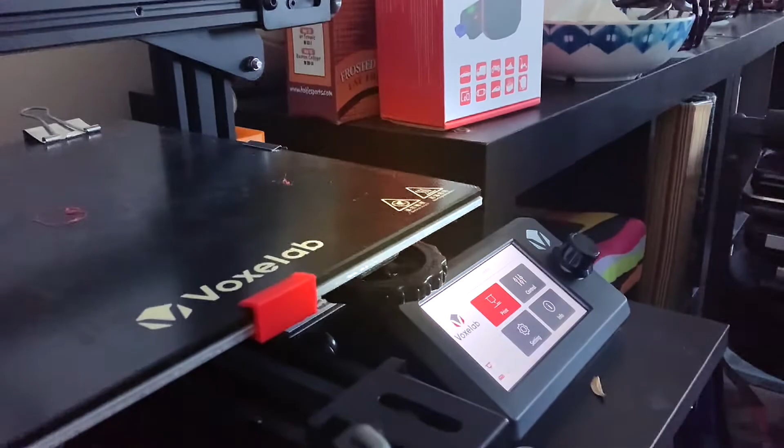It doesn't get in the way of the extruders. And it fits perfectly. I actually have one on here right now. Here, check it out. So you can see right there. Right, so get it in. There you go. That's it.

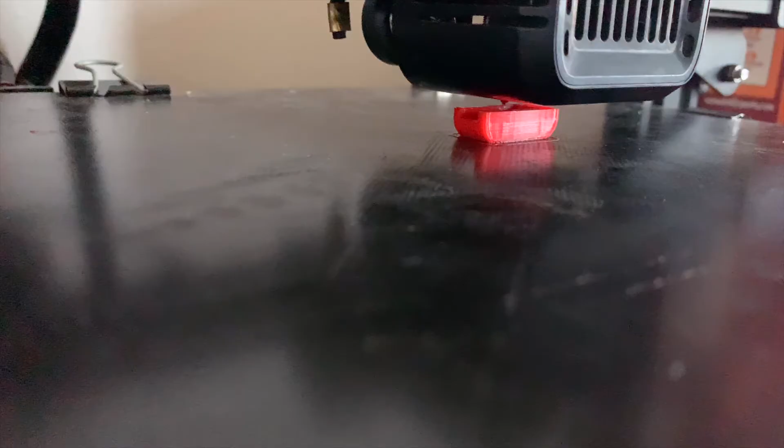Alright, here's a glimpse of the print so far. I'm just using regular PLA, but the settings I use are from 3D Print SOS. He does a lot of cool videos. I watch like all of them. And his settings for the Aquila are perfect. I barely ever get failed prints.

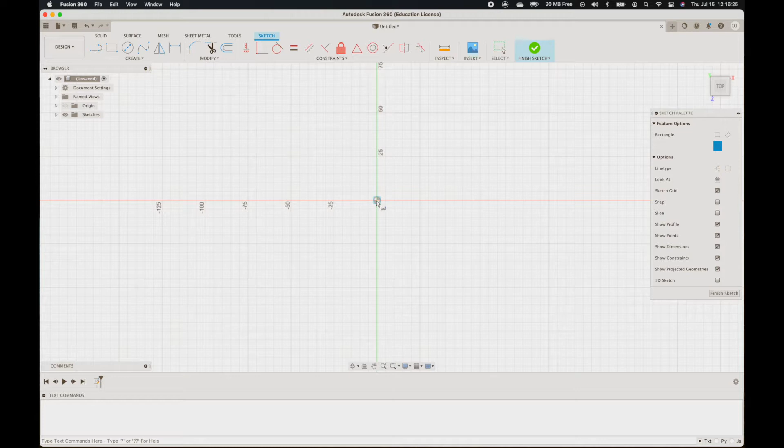Alright, so let me show you how I work this. I use Fusion 360. They give you a free one when you're a student. And I was a student, so I have a year free. So start off with a sketch. I like the dimensions to be 1 inch by 1 inch. And then we're going to create another rectangle off the corner. And for this one, we'll go 20 millimeters by 20 millimeters.

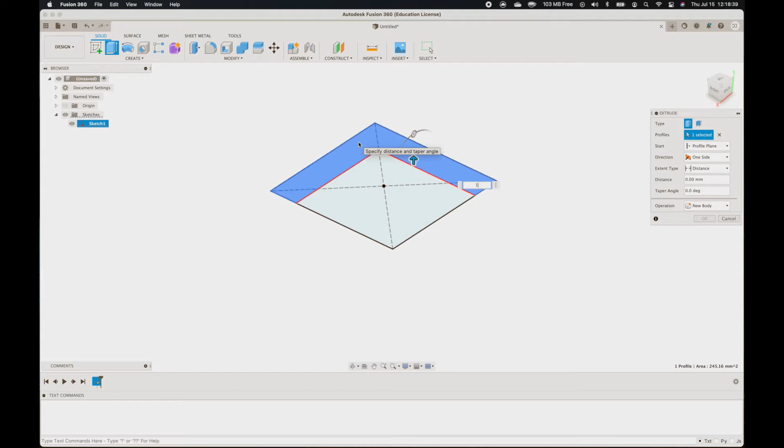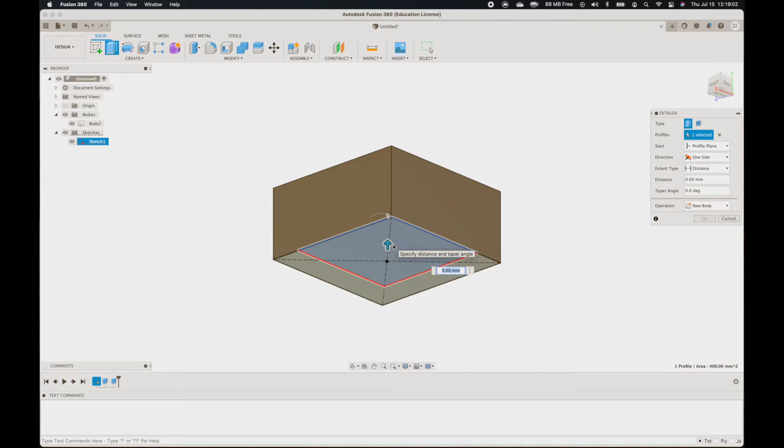So we're going to extrude the sides. We're going to extrude it to 12 because when I measured out the side of the bed plate, it's about 6.5 millimeters. So double that, it's about 12, because I want it to be slightly smaller so you get a tight grip on there. And then we're going to extrude this from the bottom to create the cavity. So I want 3 millimeters on each side. So we'll go up 9, and then we'll do it one more time to get the base 3. And that's pretty much the basic structure of it.

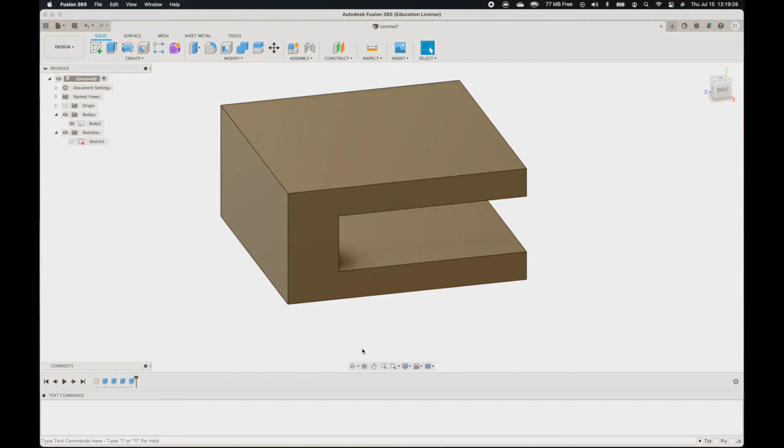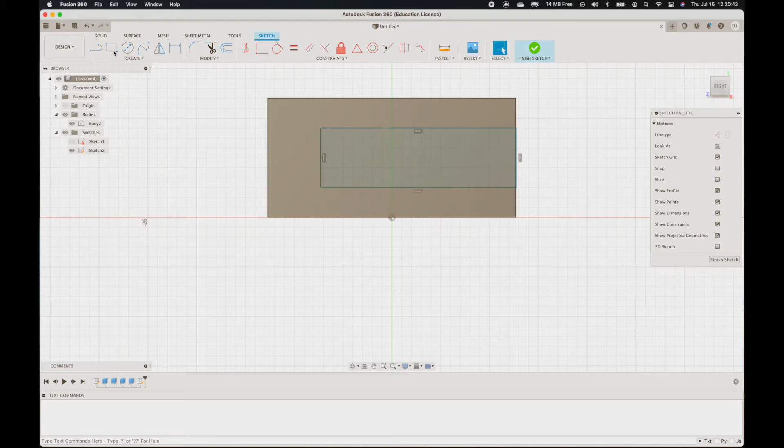However, right now the gap is about 6 millimeters, but the bed plate width is slightly bigger than 6 millimeters, so we're going to make a little gap so it has room for movement. To do that, we're going to do another sketch on one of the sides. I'm just going to try to match up the rectangle here. And then once the rectangle is done, I'm going to put these lines off the side, about 0.5 millimeters, so it's an expansion of a total of 1 millimeter in the back to 7 millimeters.

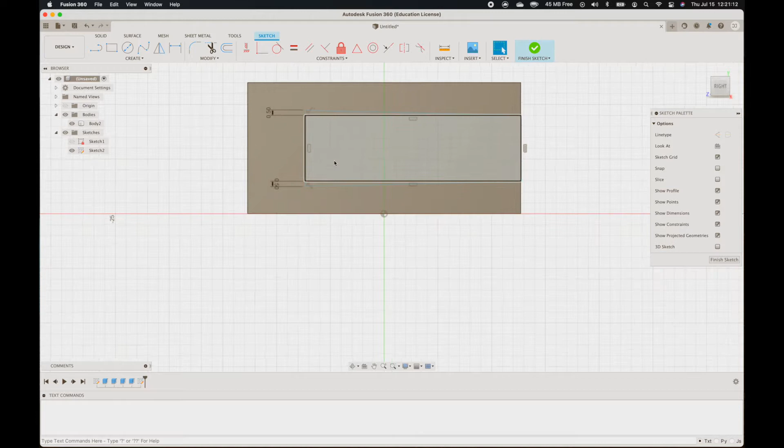Now we're just going to take some lines to create an angle. Since I don't want to do multiple extrusions, I'm just going to use the scissor tool and get rid of the original rectangle lines. So now we have this little trapezoid. Put the body back in, and then we're just going to extrude it out. You can see it's kind of in the middle, and it's not even both ways. So I'm just going to do 2 extrudes.

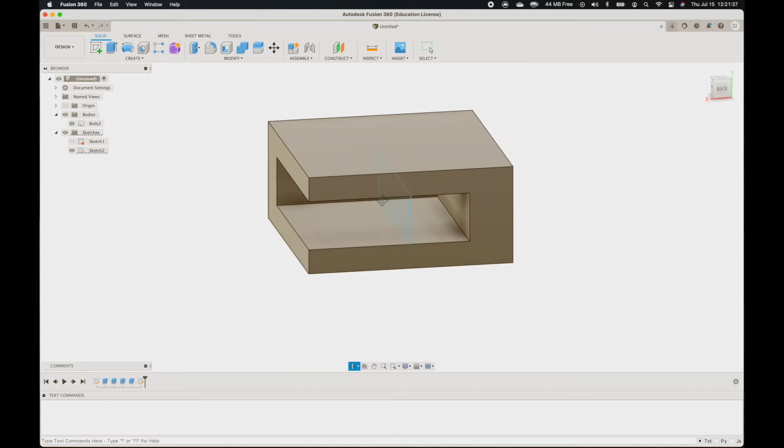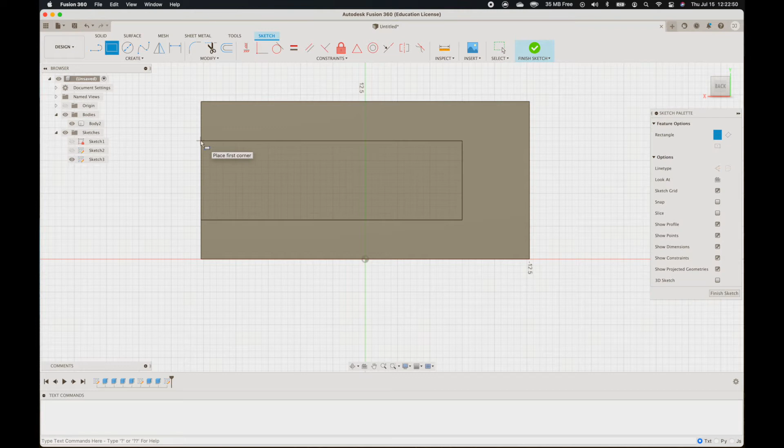So on one side, it looks like we're going to need 13 millimeters. That one's good. And then for the other side, a negative, oh, that's way too far. Too far, not far enough. That looks good, 7.5. So we have one side done, now we gotta get to the other side. Do a new sketch, same thing on the other side, create a rectangle, put the lines for 12.5, make a trapezoid, use the scissor tool to get rid of the original rectangle lines, and then we're going to extrude again.

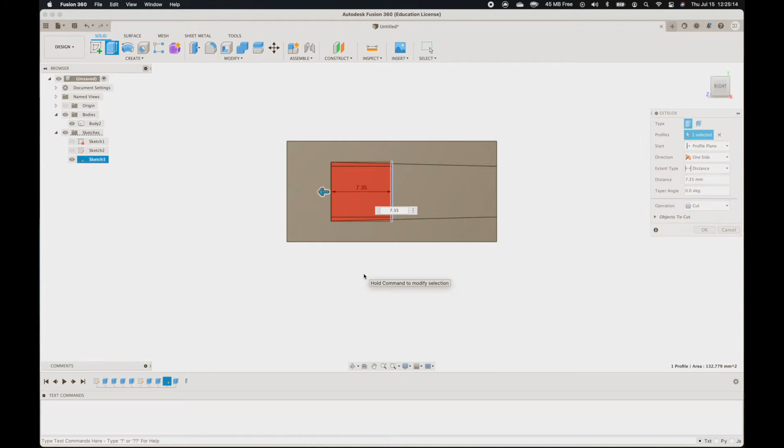So we're going to extrude it out one side, and on the other I'm going to try to match it up as close as I can. It looks like 7.35 is the winner, and that's pretty good. Now I don't like all the sharp edges, so I'm going to fillet all of them. Plus that's less material that I have to use to print.

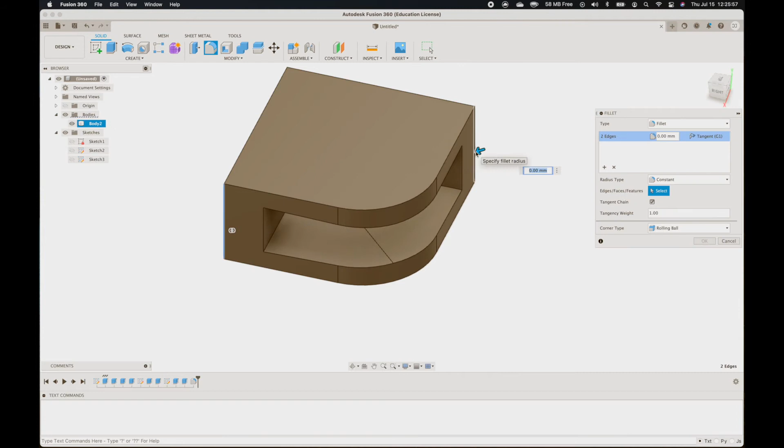We'll go with 10 on this side, that looks good. Do the two outside edges, and yeah, 5 looks good. And then finally the back, keep it at 5. And that's pretty much it. So we're going to save this as an STL file, throw it on the printer, see what happens. Alright, so the print's done. There you go. Nice and clean.

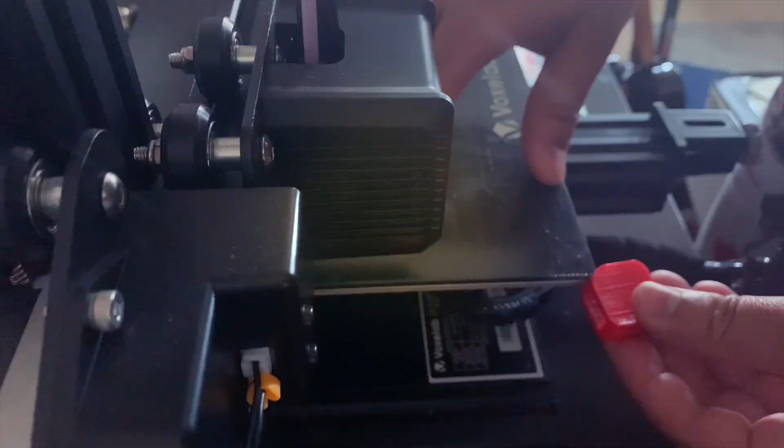Took about 30 minutes to print this, but if it doesn't fit, I'm full of shit, so let's see. A little tight, that's how we want it, and oh yes, perfect. Alright, I'm super happy with the way this turned out. The corner clip actually printed perfectly and fit perfectly on the first print. So saved a lot of filament and a lot of work.